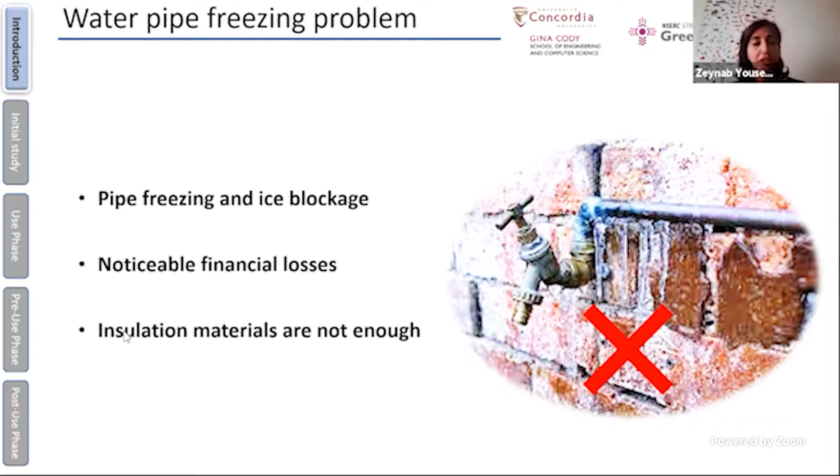As an introduction, in some regions of Canada, many households and industries are struggling with the problem of freezing the water pipes in winter time. Failure to protect piping may cause ice blockage and pipe bursting. In extremely cold weather, this problem causes noticeable financial losses, and using only insulations like glass wool around pipe is not enough. Conventionally, electric heating cables are installed around the pipes to warm up pipes and prevent liquid from freezing.

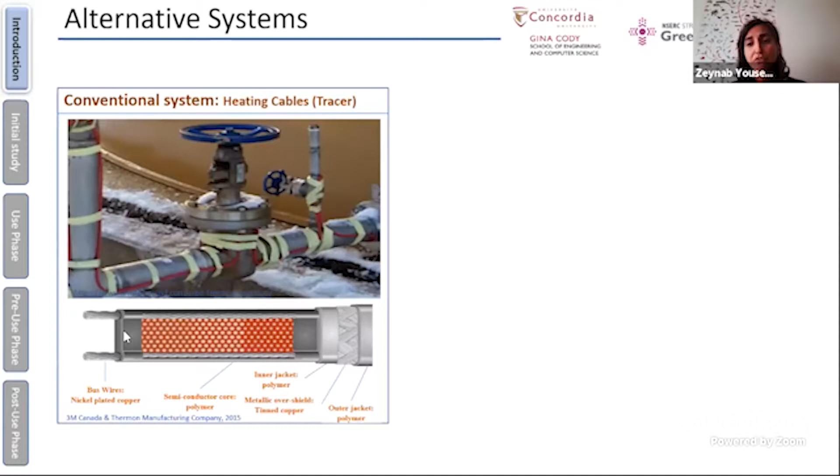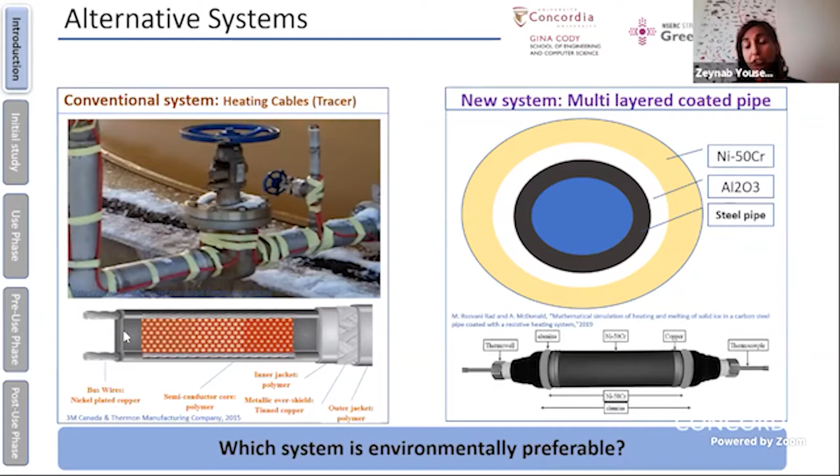As an alternative, multi-layered coating system, which is developed by surface engineering methods, provides the same functionality, but with increased energy efficiency. The new system consumes 30% less electricity in use phase. This comparative LCA initially aims to answer the question of which system is environmentally preferable. Heating cable or tracer is a specific cable with a 5-layer combination of polymeric and metallic materials. Multi-layered coating system includes 2 coating layers, alumina and nickel chromium alloy, which are applied by flame spray, and copper for electrical connection, which is applied by cold spray.

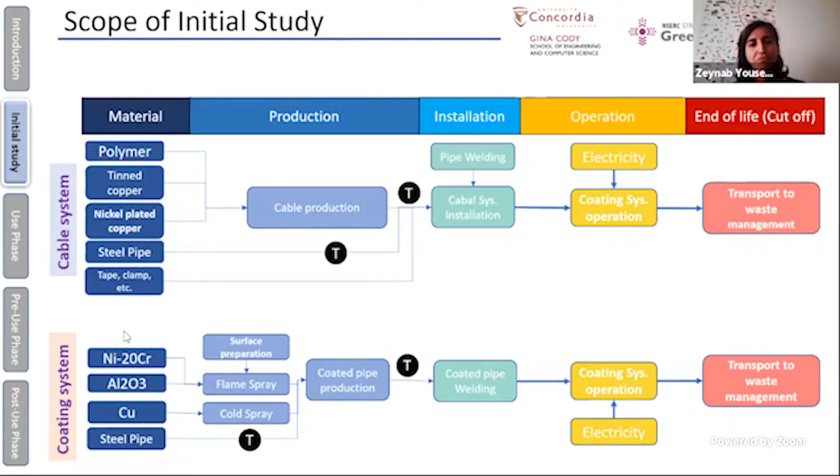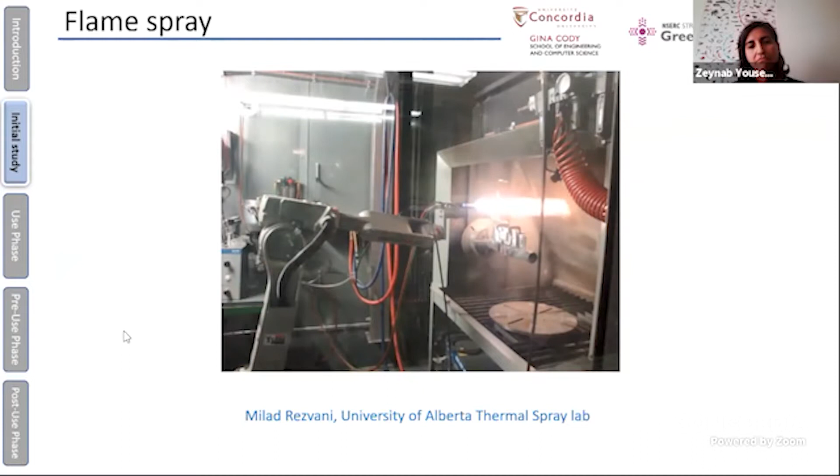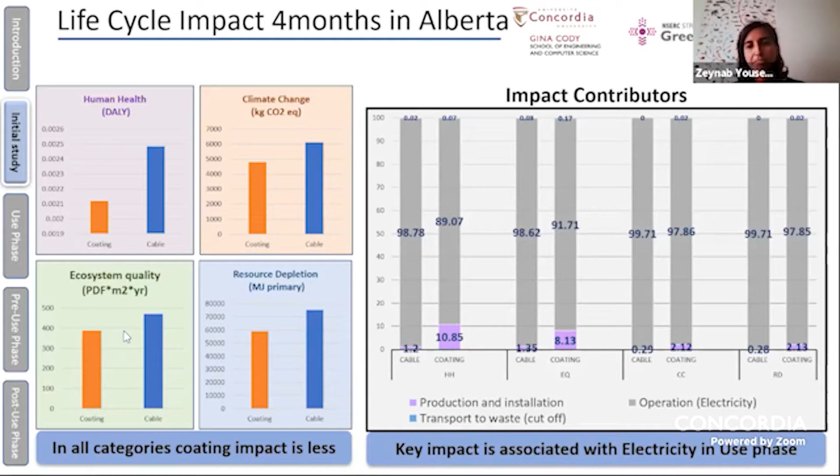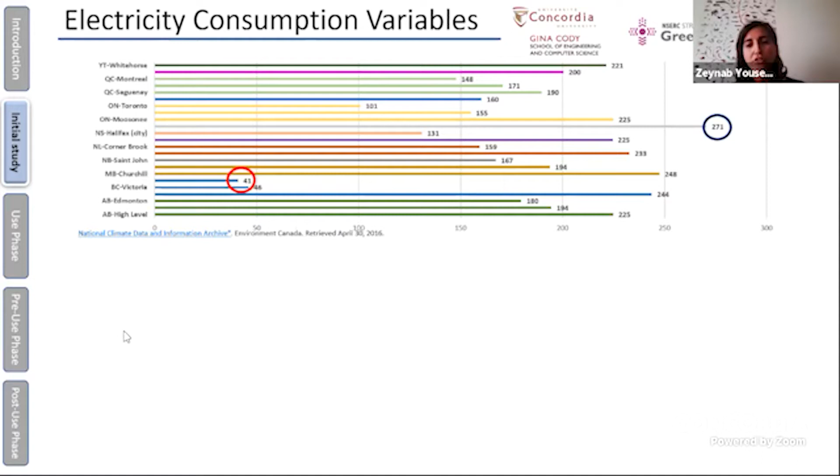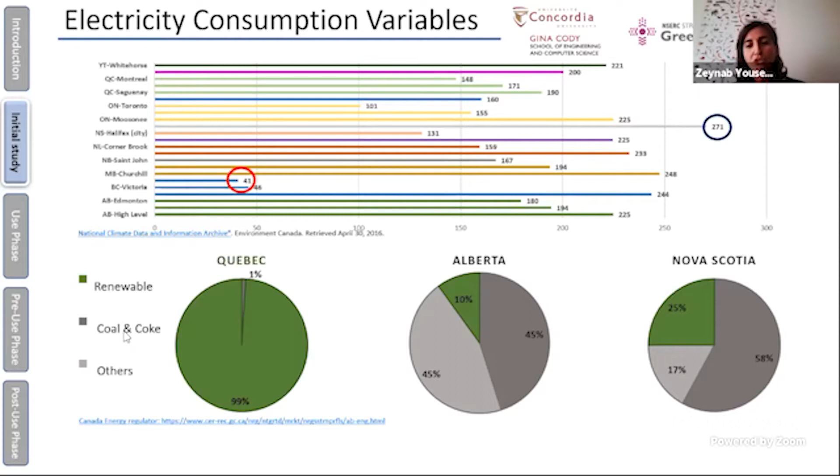The electricity impact depends on 2 variables, number of frost days and electricity mix. Let's start with frost days. What if we operate systems in colder or warmer places? As you see, we have a huge fluctuation in frost days across the country, even across each province. On the other hand, what if we decide to do assessment in another area like Quebec, which has cleaner electricity mix, or conversely in Nova Scotia with more consumption of coal and coke in its electricity mix? So in Canada, with a variety of climate zones and energy mixes, the question is, what are the environmental impacts of freeze protection systems used in different locations?

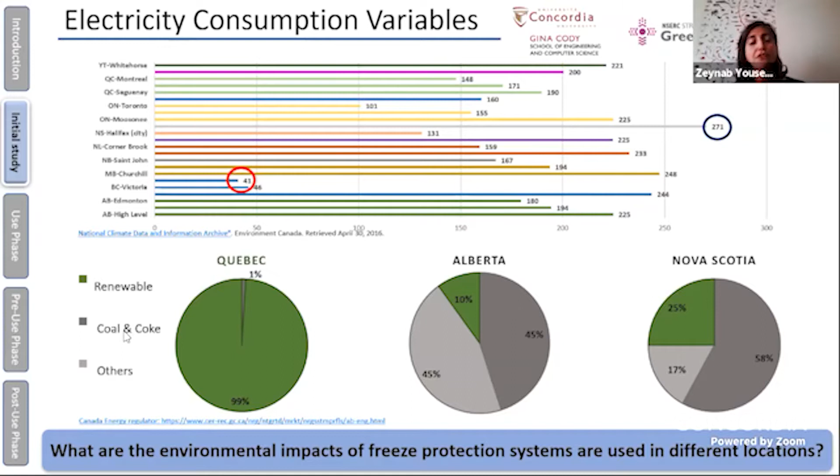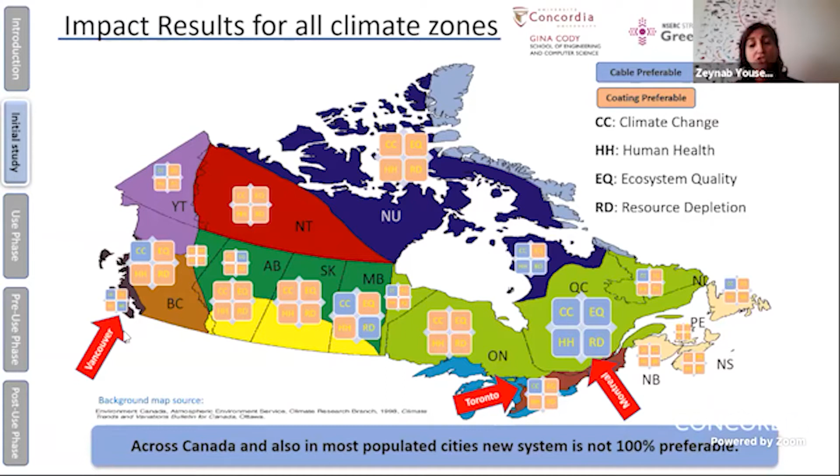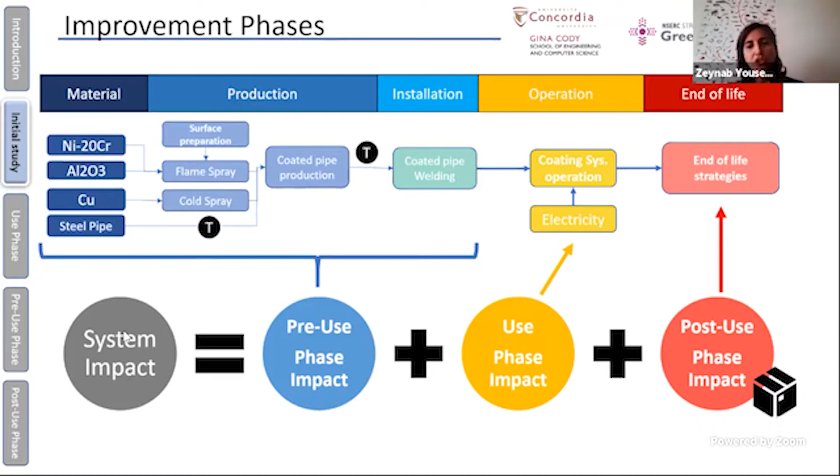Based on our findings, we expanded this study to investigate what can be done in 3 areas to reduce the overall environmental impact: pre-use, use, and post-use phases, which is still a black box, and we will try to define some strategies for that. Let's start with the most essential improvement, which is electricity in use phase. Since coating developers have no influence on the source of use phase electricity, we focused on energy consumption. For determining an environmental goal for coating system, break-even point was calculated. Accordingly, the question is, if we want to keep the current production system and just increase electricity efficiency, how much energy saving is needed for coating to be always preferable?

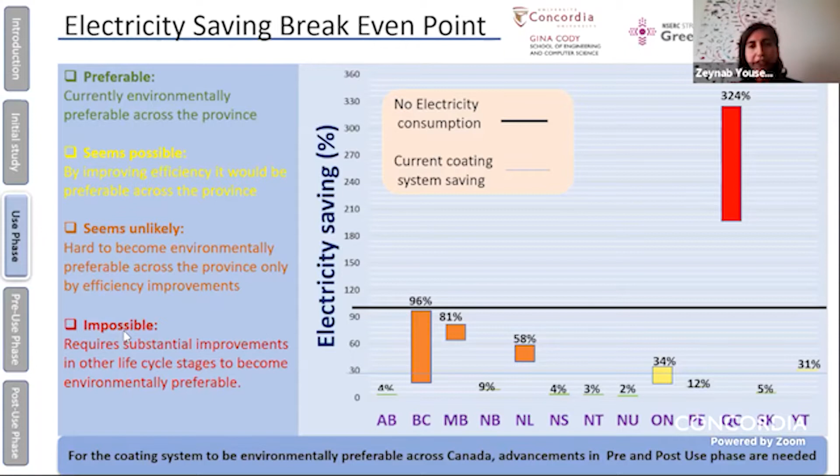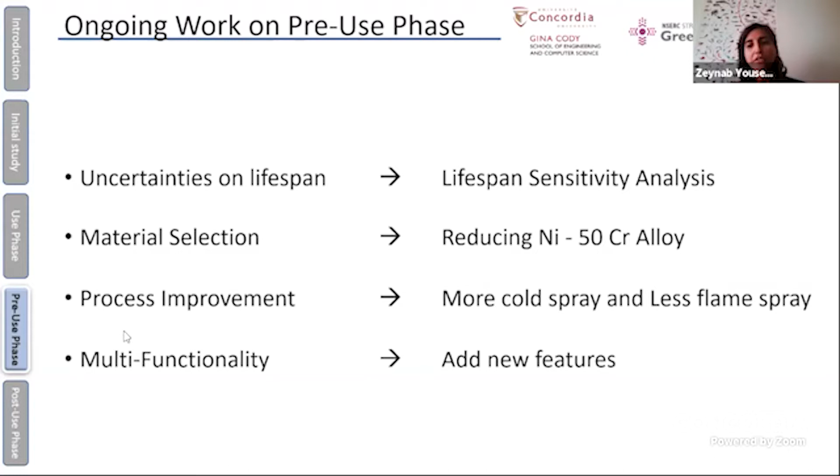From a pre-use or production perspective, in parallel, we are looking at lifespan, material selection, process improvement, and multifunctionality, and their influence on impact. However, in this presentation, I do not focus on them. Finally, from a post-use perspective, we are investigating end-of-life options. First, we are trying to understand the expected outcomes.

For example, if a coating is damaged in a field, could it be repaired? If so, what are the options for repairing it? At the end of life, what would be expected? Would the pipe system be landfilled, or would the coating be removed from the pipe? If the coating is removed, we can assume that the steel pipe would be recycled, but would the coating be recycled too?

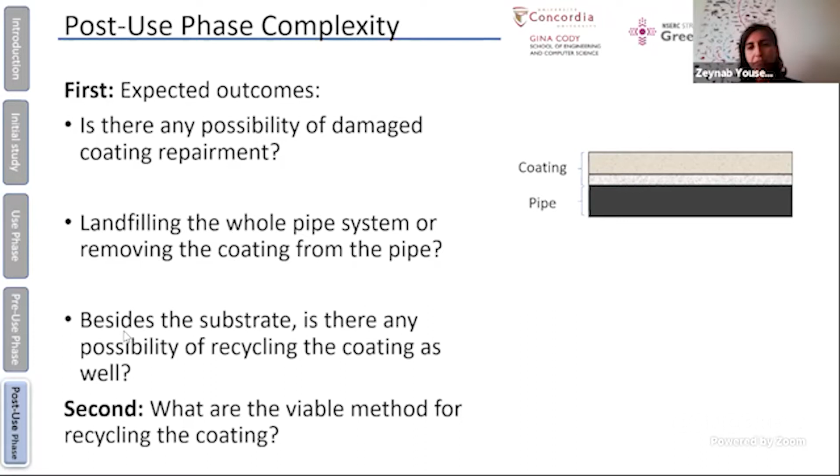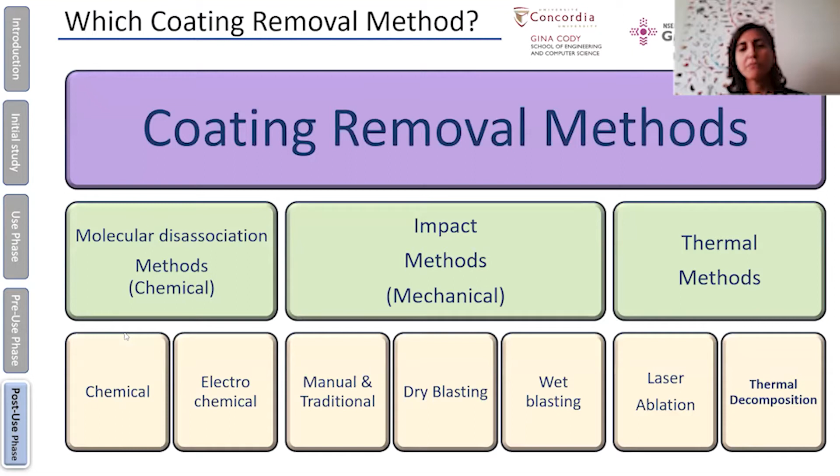Second, we are investigating viable options for recovering and recycling the coating so that we can compare and contrast the impacts from feasible outcomes, not just the status quo. There are a variety of coating removal methods. Our recent focus has been on investigating the feasible coating removal options. There are 3 general categories of removal methods: molecular disassociation or chemical methods, impact or mechanical methods, and thermal methods. Let's take a closer look at each category.

Molecular disassociation refers to those coating removal methods whose process drivers are chemical reactions. Chemical methods encompass immersing, brushing, or spraying a chemical agent on the item with the purpose of removing its coating. The chemical agent can be acid, alkaline, or neutral, and the most famous applications of chemical methods are pickling, descaling, and paint removing.

Electrochemical methods are the reverse version of electroplating. In electroplating, electricity is used for binding ions like chromium to the substrate, but electrochemical stripping aims to remove molecules from the substrate.

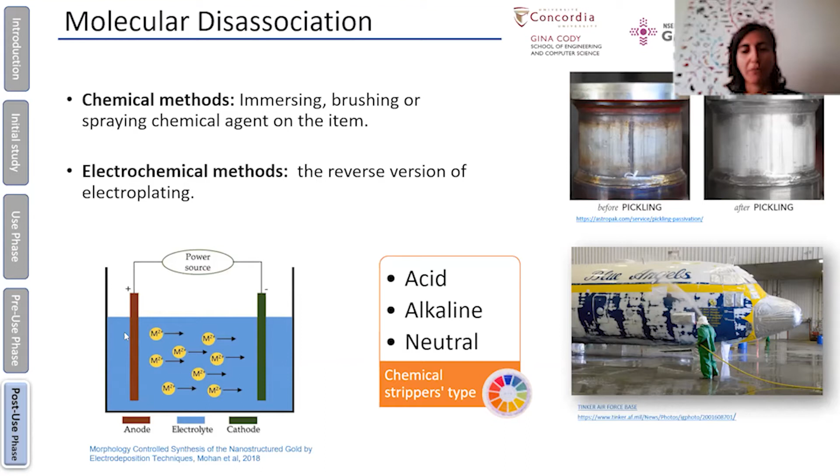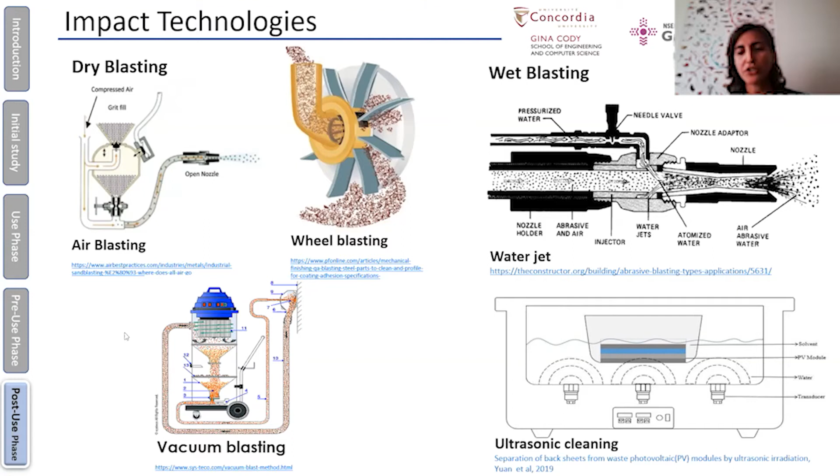Also, there are vacuum blasting systems that make it possible to gather the dust and abrasive materials and then separate them. In a group of wet blasting technologies called hydrojets, high pressure water is used as abrasive media. In other systems, the nozzles are designed to make it possible to add abrasive particles to increase efficiency. In other wet cleaning methods, the ultrasonic vibration of water is utilized for cleaning the surface.

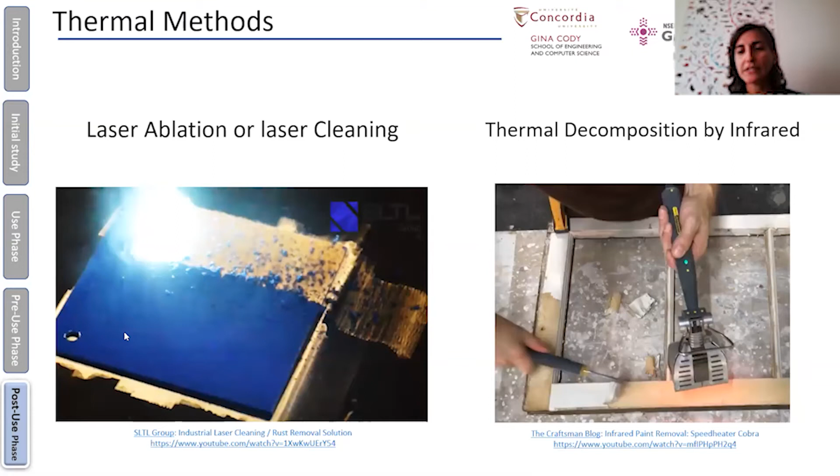The most important thermal methods are laser ablation and thermal decomposition. In laser ablation, a laser beam is focused on a coated surface to remove material from the irradiated region. Laser ablation involves complex, nonlinear physicochemical mechanisms. Thermal decomposition refers to the method in which chemical decomposition is caused by heat. In this technique, by using infrared or laser, the coating is heated up and removed from the substrate.

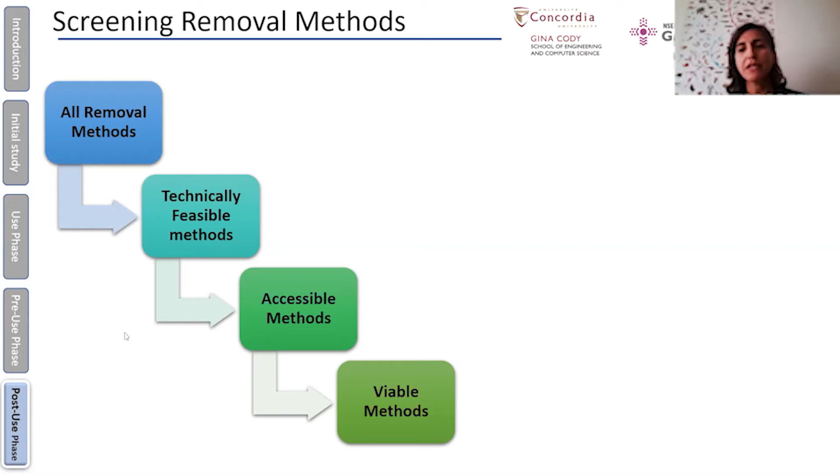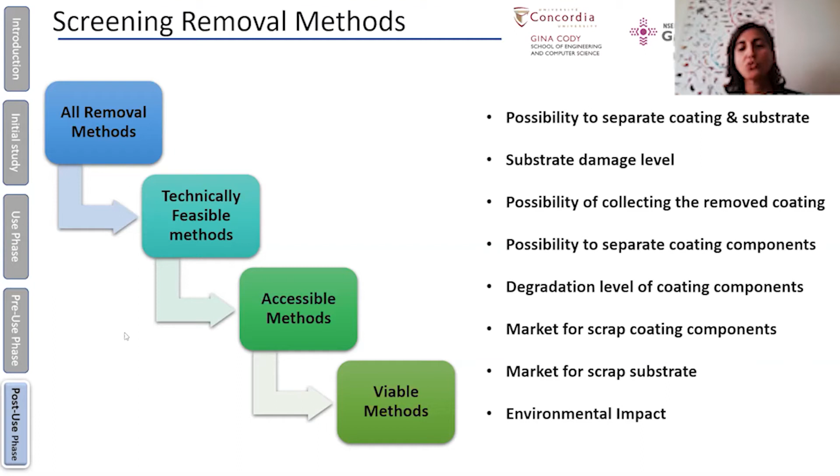We aim to screen all removal methods to find technically feasible methods, financially accessible technologies, and among them, the most viable methods. Accordingly, we are in the process of interviewing subject matter experts in the field to understand the feasibility of each removal method. By doing so, we are investigating criteria including possibility to separate coating and substrate, substrate damage level, possibility of collecting the removed coating and separating coating components, degradation level of coating components, and market for scrap coating and substrate. Once we identify a set of viable methods, we will then update our LCA to include these recycling strategies.

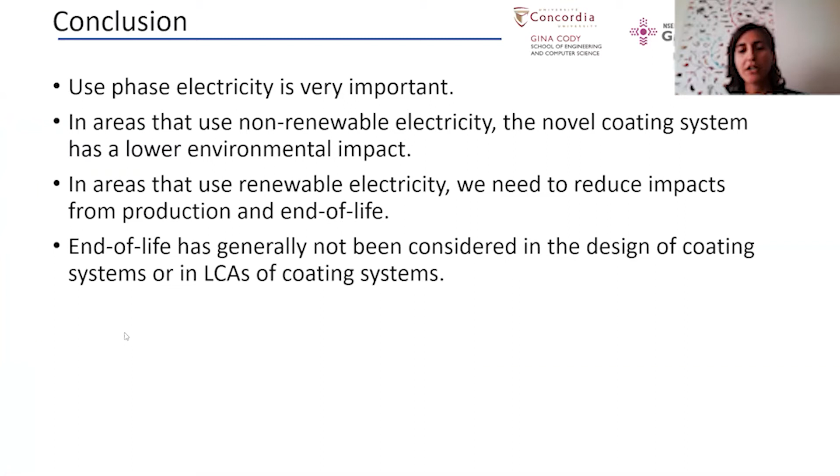To summarize our findings today, for this case study, use phase electricity is very important. In areas that use non-renewable electricity, the novel coating system has a lower environmental impact. In areas that use renewable electricity, we must focus our attention on reducing impacts from production and end of life. End of life has generally not been considered in the design of coating systems or in LCAs of coating systems.

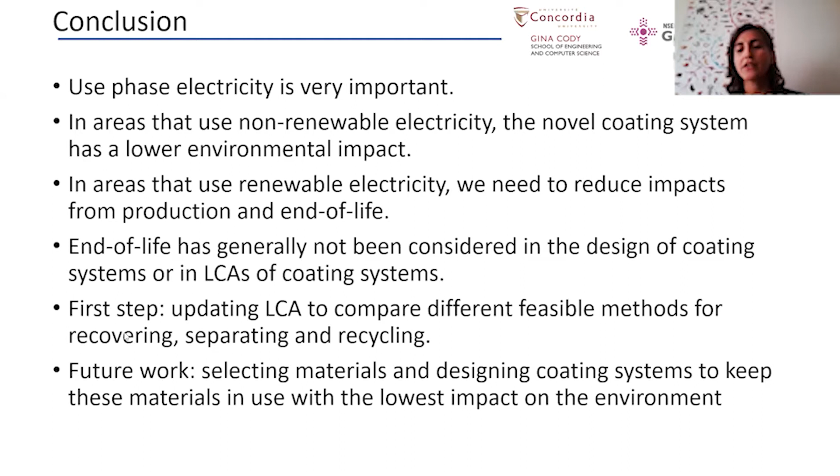As a first step, we are updating our LCA to compare and contrast different feasible methods for recovering, separating, and recycling the coating materials. Future work can then look at selecting materials and designing coating systems with the intention of keeping these materials in use with the lowest impact on the environment.

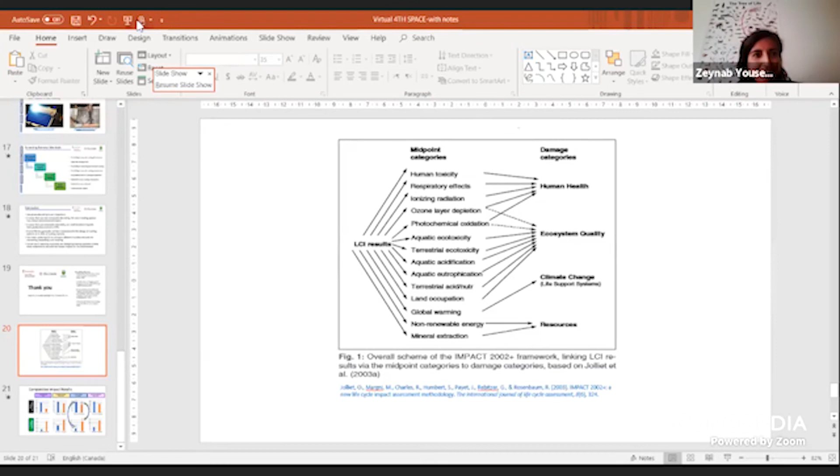Okay. Human health is a sum of the impacts of some midpoint areas like human toxicity, respiratory effects, ionizing radiation, ozone layer, and some other things, of which I just show some. For example, for ecosystem quality, we have photochemical oxidation, aquatic ecotoxicity, and yeah, this is the damage from these midpoint categories.

Did I answer your question? Yes, more or less. I could follow up, but I have a question for somebody else so that I don't dominate.

So I have a question from Alex Matveyev, who asks about these coatings. Do they essentially work electrochemically, i.e. as a battery, and do not require external power sources?

The electroplating, it is a cell. It's like a cell. You put anode and cathode in an electrolyte, and the liquid between these two electrodes makes it possible to transfer the ion from one electrode to another, and the direction of the transferring of the ions is determined by which electrode has the positive current and which one has the negative one. This is the action of the cell, the battery, and we use it in different practices of the industrial practice for removing the coating or applying the coating.